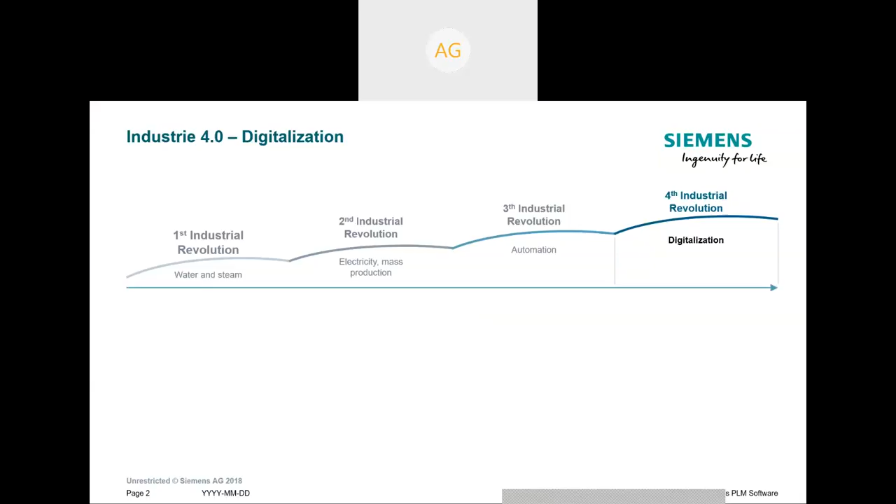Today is the time when we are migrating from the third industrial revolution to the fourth industrial revolution. It all started with the first industrial revolution, when we talked about steam engines, then mass production, and automation, when controls and robotics or hard automation became more prominent. We've all seen the complete third industrial revolution, and we are now in the phase of migrating from the third to the fourth industrial revolution.

In short, we call this Industry 4.0. Basically, what Industry 4.0 brings to the table is the combination of digitalization and digitization, which means the collaboration of design, controls, and many other things over the web.

When I talk about this industrial revolution and digitalization, what it essentially brings for us is an integrated value chain, meaning the flow of information between different departments, countries, and zones becomes seamless. It's not like each department or organization is working in its own silo. So in short, the meaning of Industry 4.0 is basically to have a seamless flow of information between different departments.

It's not like maintaining files and sending them through some person, where there's a lag of information. All these errors or problematic things are completely siphoned off when we implement Industry 4.0. Apart from the integrated value chain, we also incorporate the technology of product and production twins, which is nothing but the digital form of the product and production, and how that product will actually perform. So basically, we're talking about the digital twin of the product and production.

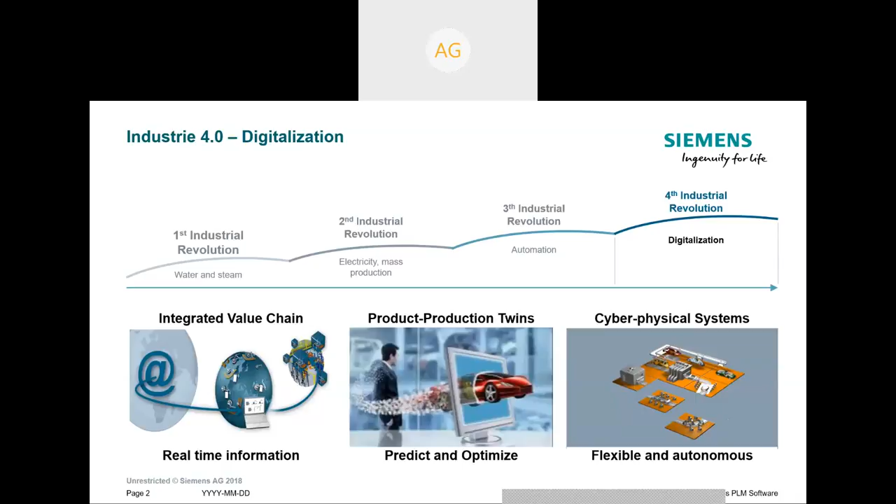So what does digital twin actually mean? I'll start with an example. If I want to design a water bottle, let's say a simple water bottle, that's the concept - that I want to have one water bottle. That's the idea, and I need to put that idea into some digital format, which can be a CAD software. So I'd like to put the idea or image of that water bottle into digital format using some CAD tool. That's the digital twin of the product, in the form of ideation.

Then the second part is the realization. How would this bottle actually be made? What would be the process of manufacturing this bottle? I'd like to put that complete production methodology into digital format - that's called the digital twin of the production setup.

Then third is the utilization - what if the design I've made is functional or not functional? Is it useful for the customer? That's the concept of the digital twin of what we call performance.

If I take the example of an automotive or a car, how do we say that the car is good? It should have minimum NVH - noise, vibration, and harshness - all those things should be minimum. That's the performance level which we check, and we call it the digital twin of the performance.

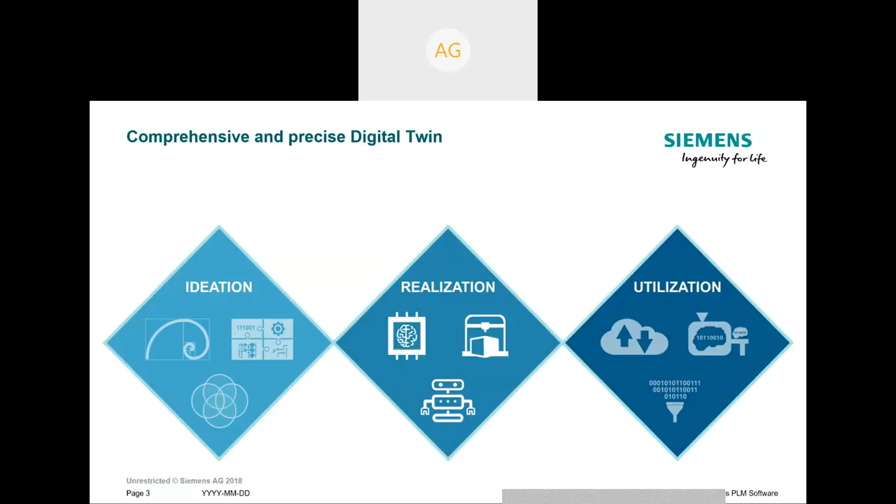In other words, we identify them as digital twin of the product, digital twin of the production, and digital twin of the performance, which means we are not actually making the product. We are making the product digitally first. We are validating the production scenario digitally first. We are checking the performance of the vehicle or any object through digital performance first.

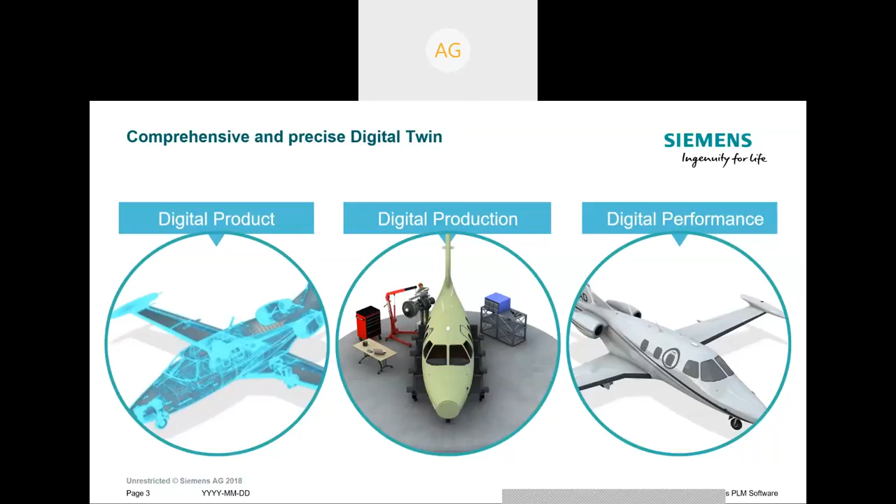So when all these digital twins are verified and completely validated, then through this holistic digital twin, we get our matured product in the market. That's the concept of the digital twin, and that's an integral part of Industry 4.0.

If I go back to my first slide, Industry 4.0 was written as digitalization. So we have converted everything from product, production, and performance into digital format. And how are we exchanging the information? That is through digitization. So Industry 4.0 is nothing but the combination of digitalization and digitization.

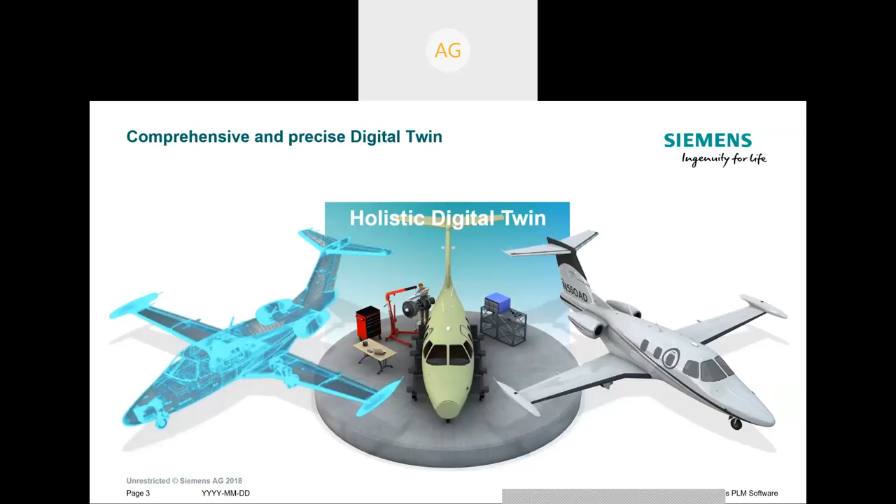So robotics plays a major part. Rather, the robotics have evolved over a period of time. So it's not only robotics, we will be talking about advanced robotics. Advanced robotics is nothing but integration of the advanced functionalities of artificial intelligence combined with various sensors.

Now look at this particular graph - the robot population worldwide is increasing ever, at the rate of about between 20 and 30%. If we go see till 2021, as per the information from this website of IFR, it shows that the average growth would be around 14%. Of course, this has not considered the current scenario of COVID, but we all can stay positive only.

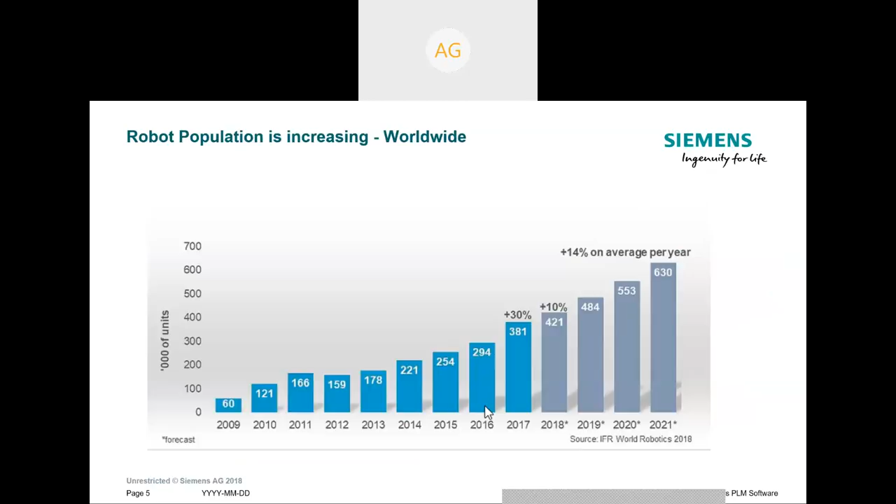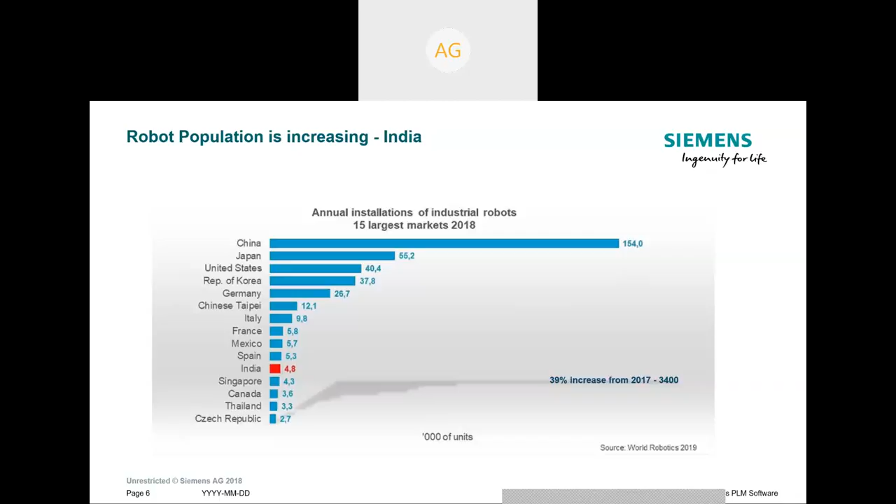Positive is the way to go forward. As per the data, 14% is the average growth of the robot population worldwide. And if you look at where India stands, India's robot population is also growing gradually and at a fast rate. If we compare it from 2017, the robot population has increased by around 40%, which is a good increase. And this robot population increase is not restricted to any specific industry.

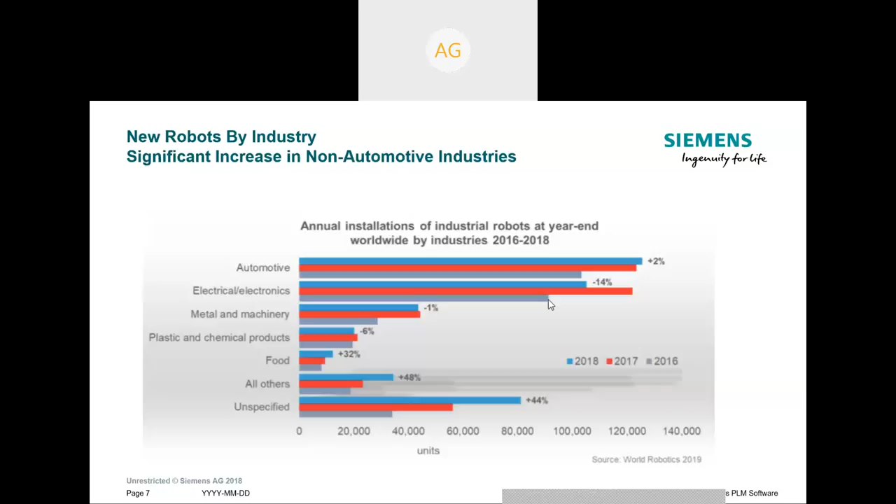If I go back to 2013-14, the majority of the robots was in the automotive sector. But in the last 4 to 5 years, the implementation of robotics plays a major role. But what is the use of robotics in the electrical and electronics from the assembly point of view? There are multiple robotic vendors such as KUKA, FANUC, ABB. All these robot vendors are making robots not only for automotive organizations but for different organizations, or general purpose robots which cater to all industries.

Now we see why we see this big trend of robot population increasing. There's a reason - the manufacturing trends in the industry demand for robotics. If I talk about an automotive organization, now a single organization is not making a single vehicle on their line. A single line is producing perhaps 4 to 5 different variants of the car.

That's called flexible production, which means if there are 4 robots on a single station, that particular station is not working for one car. So they would be reprogrammed, or the programs will switch from number one to number two, looking at what type of car is in front of them. So that's the flexible production - the robotic programs change automatically whenever a different variant of the car comes in front of them.

Global expansion is again a very important cog in the wheel because of Industry 4.0, because it means that we are designing at one place and building at another place. It's not necessary that if I'm making the car in India, it has to be designed in India. If you're designing the car in India, you can produce that car in Europe as well. So that's global expansion, which means the flow of information or data has to be seamless.

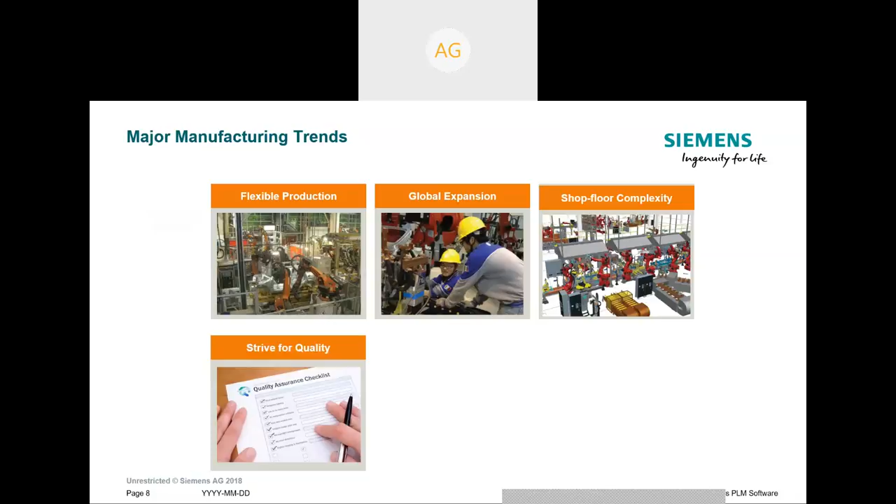That's the shop floor complexity that demands the implementation of new technologies. And strive for quality - we do not want to launch a product in the market which is not good quality, so new technology components have to be introduced. Constant improvement is like reusing the engineering knowledge. If I have designed one car today, when the turn comes for the next car, I should not be restarting the engineering from step one. I should be able to reuse my previous engineering knowledge for the next project. So that's the gist of the major manufacturing trends that lead to the implementation of robotics in a major way.

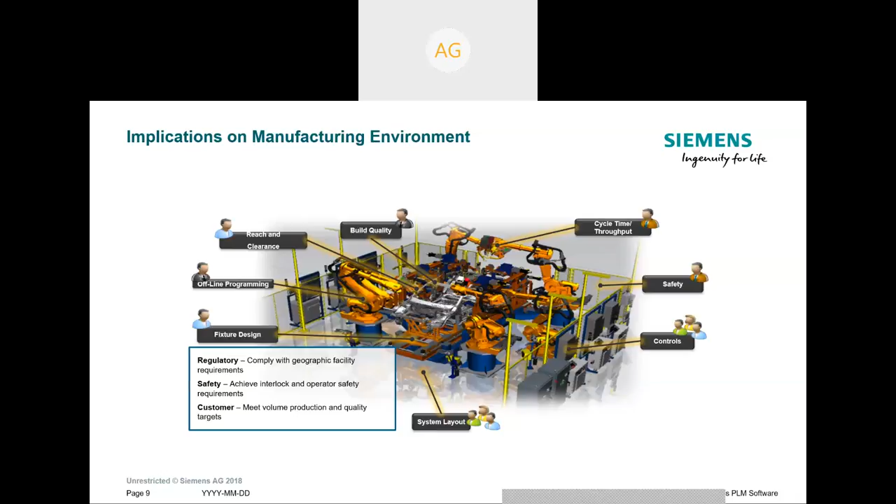So when we are talking about the implementation of robotics, it's not that we buy a robot and just put it in place. There are so many things that come into picture during implementation and commissioning. The robots have to be placed at the right position, we have to think about task distribution among different robots, and at the same time consider the safety aspect, and also the controls point of view.

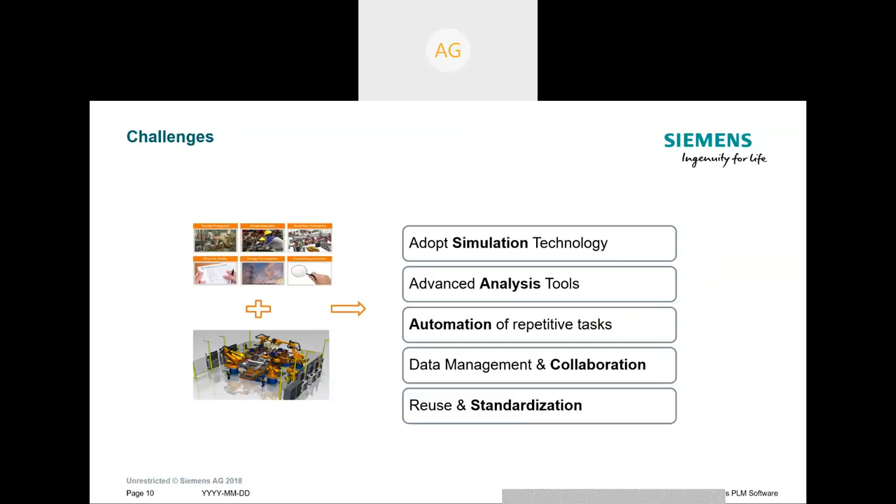So there are many implications when we talk about implementation of robotics, which means we need some kind of solution, which can be a simulation technology that gives us a matured or optimized solution. That simulation technology must address all those manufacturing challenges, implementations, and implications of implementing robotics. So I don't want to get into the details of why these simulation technologies exist, but what can we do using these simulation technologies when talking about robotics.

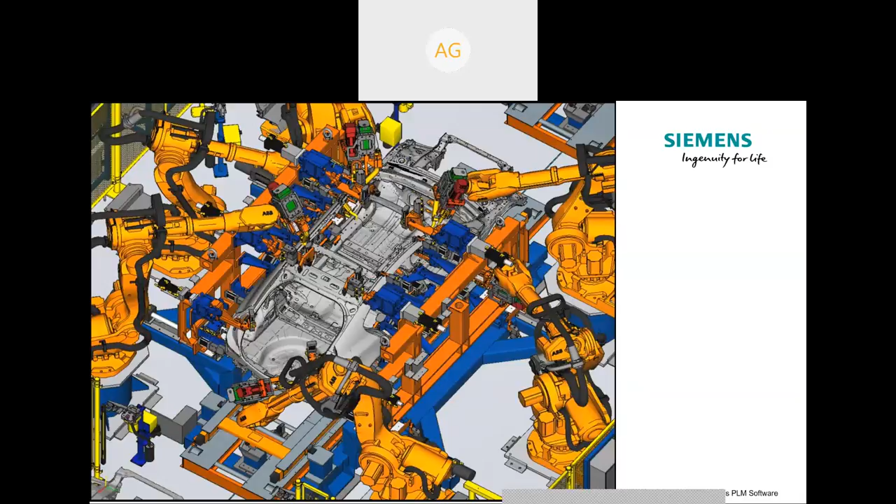So this is one example of a car organization where there are multiple robots working together to make one car. It's a combination of various electromechanical equipments - there are robotic weld guns mounted on top of the robot. The demand of the industry is that the operator or shop floor person should not be spending too much time on the shop floor.

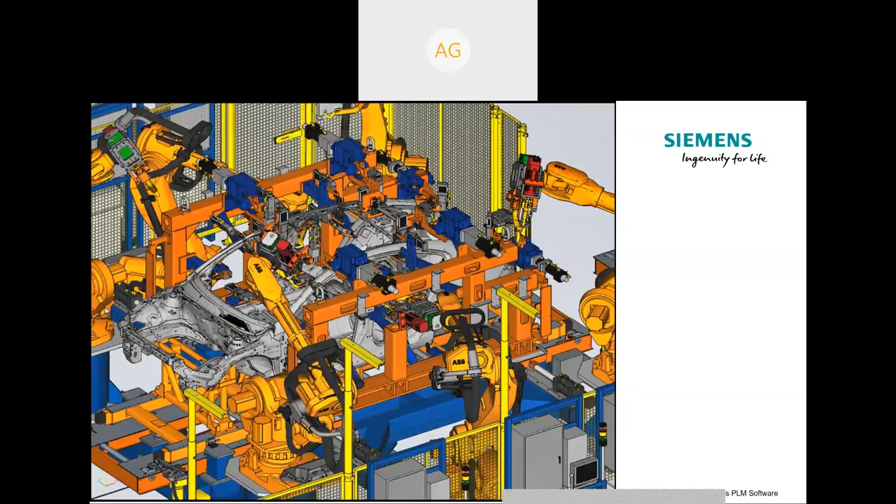So the simulation technology helps the engineer validate all those things in the simulation software and program the robots of any make, validating them inside the simulation software so it can be downloaded directly to the shop floor. So there are multiple components when we talk about the usage of robotics in the simulation environment.

We have the robot controller software, which we call RCS. Normally this RCS is developed and given by each robot maker, and then there is the OLP, the offline programming concept, which helps the simulation software download the robotic program in the right syntax as required by each robot vendor. So there are multiple robots which require to be programmed, and this simulation tool should be able to provide a matured robotic program that we can validate inside the simulation technology.

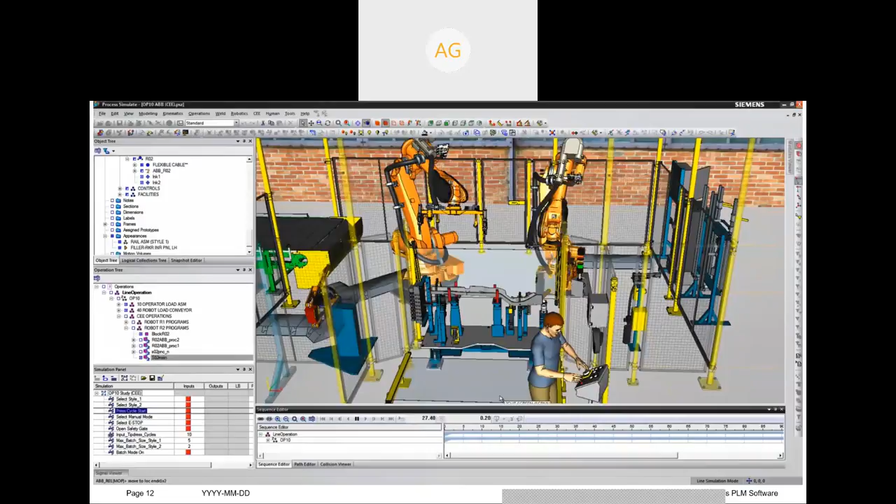So this tool, which is being developed by Siemens, has been used in most of the industries in India, and it's a generic tool for all the robots.

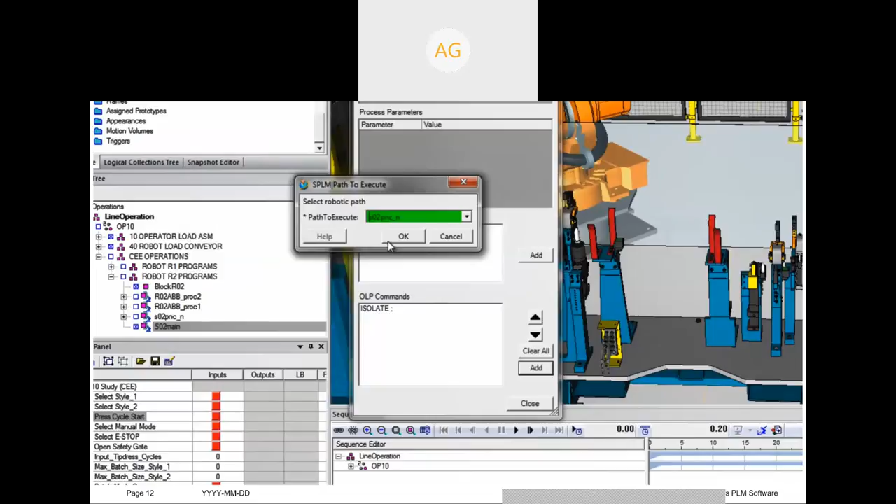With the help of this simulation tool, one can generate or add all the proper syntaxes of the robotic program. One can define the input, output, or any kind of signal required for the robot to communicate with the PLC or the robot controller itself.

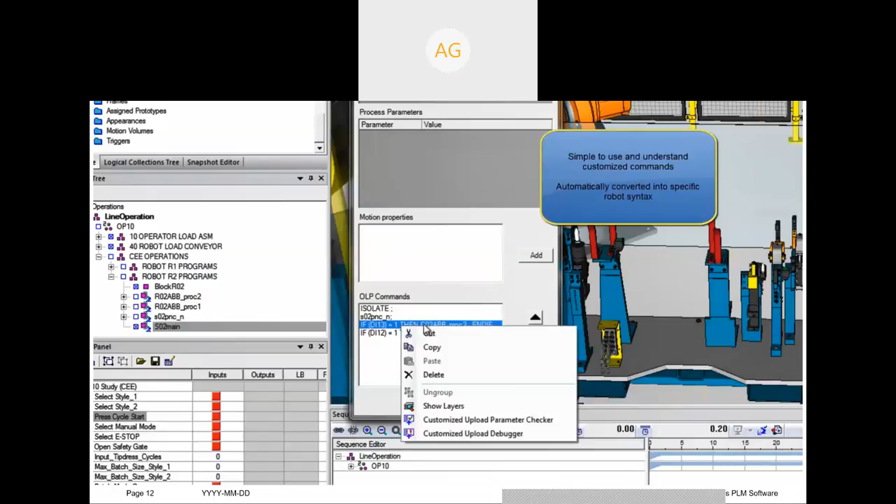Any production line will not be making just one car at one time. It can be a combination of various cars, so we call them variants. We can check the production scenario of different variants inside the simulation software.

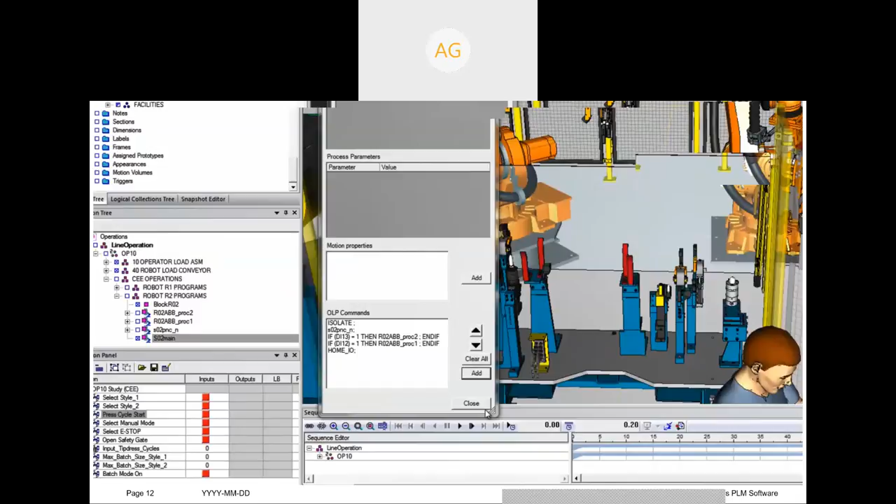At the same time, we are also doing event-based simulation. When I say event-based simulation, that means if a robot has a gripper in its hand and it has to pick the part from the fixture, the robot should move only when the clamps on the gripper are open and the part is present in the fixture. Only then should the robot move down.

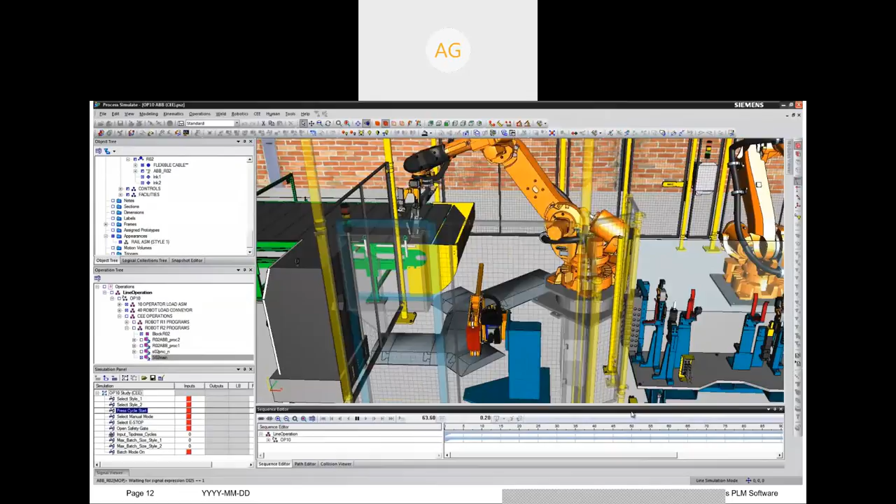That's the event-based simulation, which means when event A happens, only then event B will happen. And when event A plus B happens together, only then event C happens. That's the meaning of event-based simulation.

In this simulation technology, we are checking the production behavior of two or multiple variants being produced in the same environment, and the different robotic programs are also validated inside the simulation environment. So that is the pick and place application.

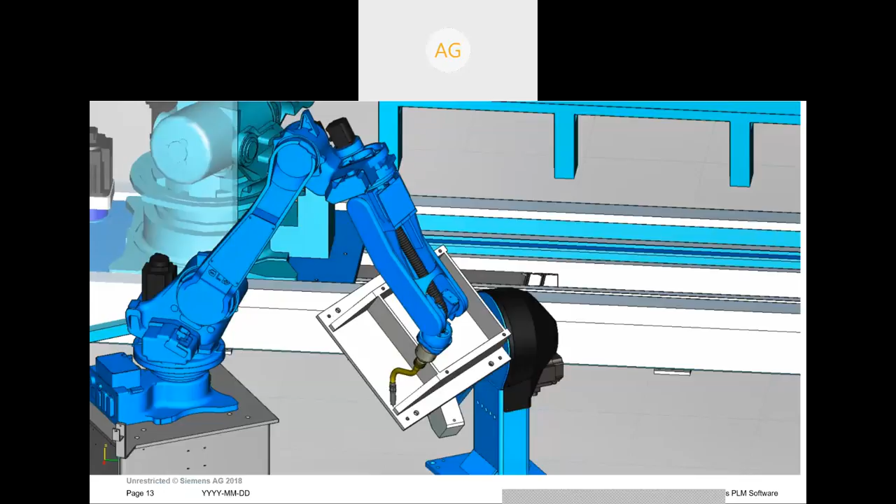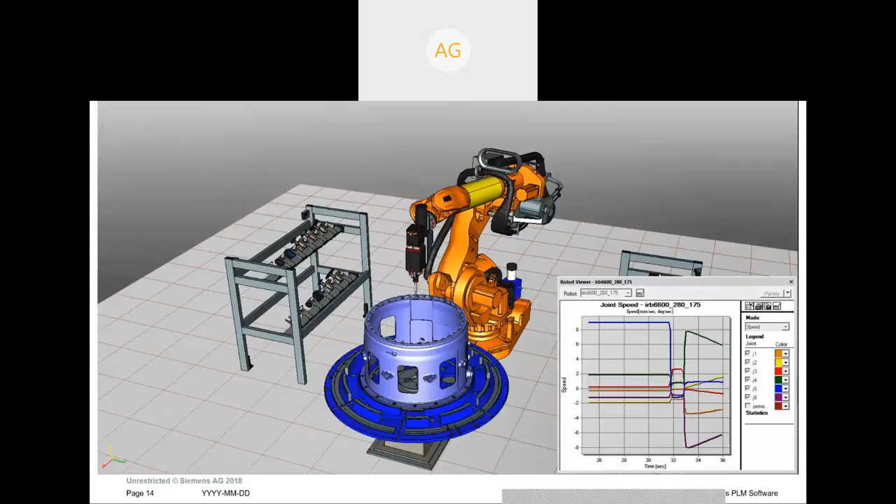Another application of robotics is the deburring application, wherein the robot picks up the tool and does the deburring. We are also monitoring the robot joint behavior in the robot viewer on the right hand side, which helps us in smoothing the robotic motion.

It's not only limited to just one robotic vendor. Any robotic vendor, it can be Kuka, Fanuc, Yaskawa - all these robotic vendors can be put to test here.

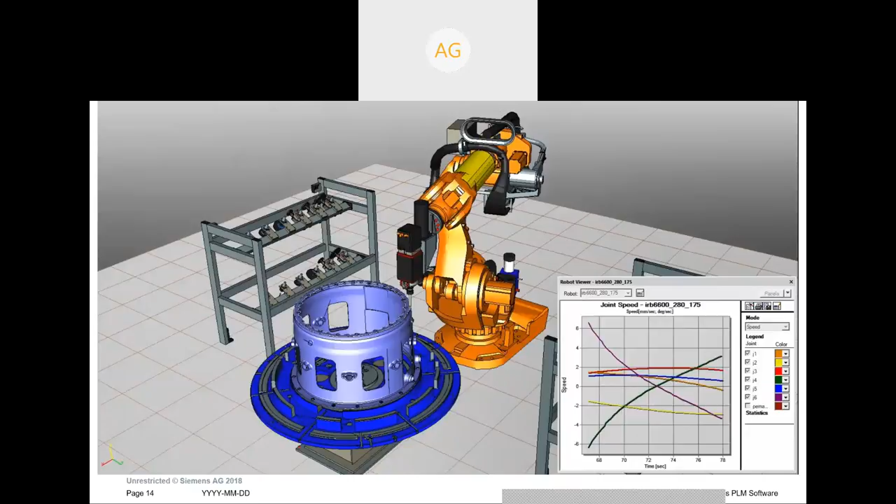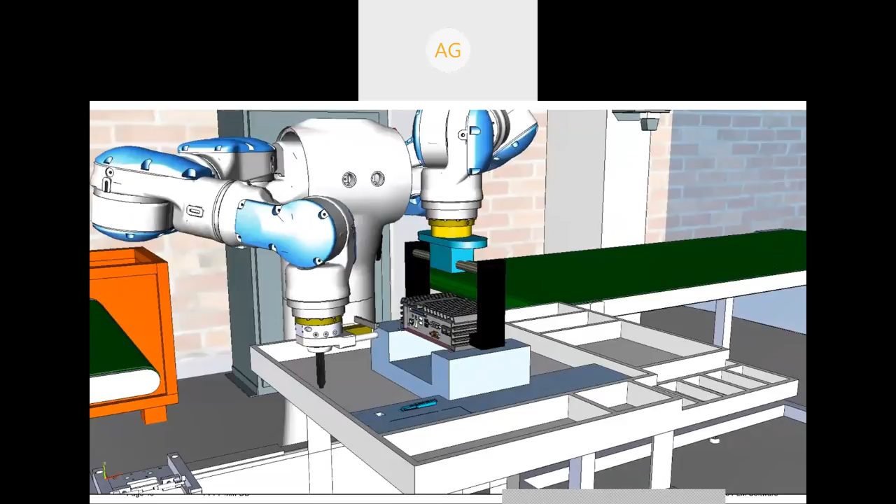In this case, you see that an amplifier is getting assembled here, and we can easily plan the motions offline rather than doing them online on the shop floor.

So this is the application of robotics and how robotics can be made easy with the help of simulation. Up till now I have spoken about the usage of robotics, and whatever we have seen till today are the traditional robotics.

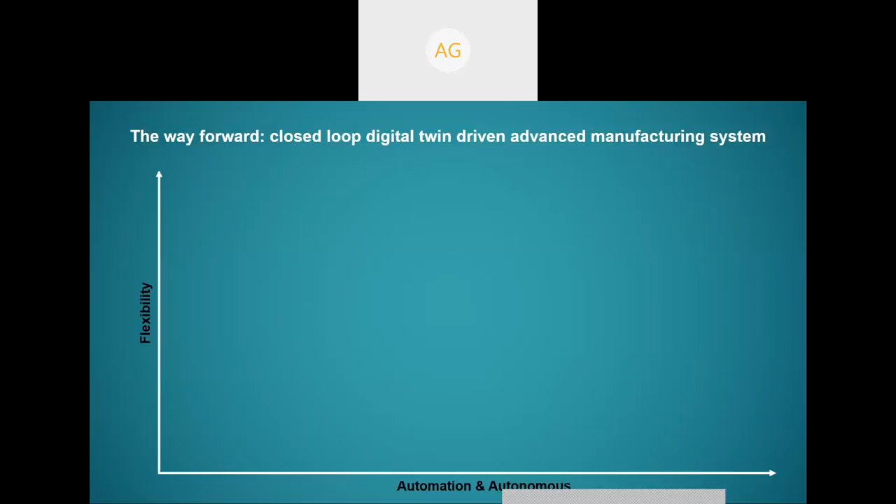Now, what is the way forward? Because whatever I've spoken is completely independent of what other part of the factory or the design house is doing, the way forward is to have a flexible and autonomous kind of solution.

I think that's the motive for all of us to be in research and development and do more research towards making flexible robots. Anyway, the robots are flexible, but the autonomous aspect is where human intervention is very less.

I think it all started with fixed manual, where there were no robots, then flexible manual, then we have fixed automated lines. Whatever we had seen in Industry 3.0, we spoke about fixed automation. Now in Industry 4.0, we are talking about flexible autonomous, which means the robots or any programmable devices we use should be flexible enough and have minimum human interference, and the communication should be seamless. That's the demand, and that's the way the industry is looking forward, completely as a closed loop.

With the help of digitalization and digitization, we are going to make it a closed loop, so that if I design from point number one, the feedback should also come back to point number one, so that I could make changes at point number one and send it to the shop floor after receiving the feedback.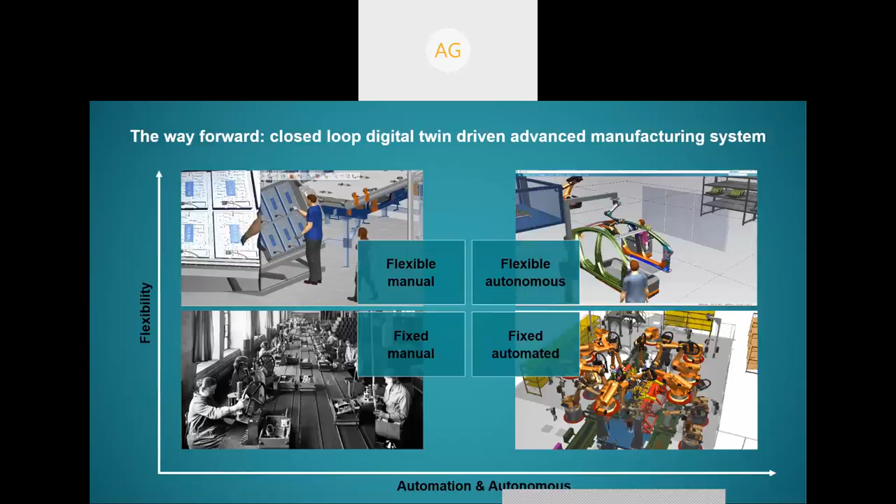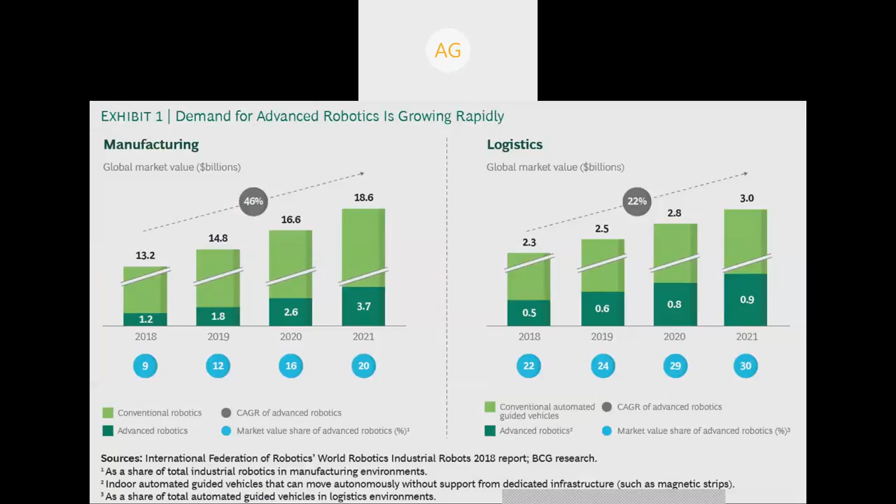This graph reflects that industry is responding very strongly to the adoption of advanced robotics. We can see drastic growth, about 46% from the manufacturing point of view, and from the logistics point of view, a very strong growth at 22%. This shows that the usage of advanced robotics is increasing rapidly. By advanced robotics, I mean the usage of sensors, AI, ML, cybersecurity, and other components of Industry 4.0. From Siemens terminology, advanced robotics is a combination of various technologies, and the industry is responding very strongly.

In this video, you would see a very strong technological component which we call virtual commissioning. Normally, there's a production line with 100 or 50 robots, and the PLC is always talking to the robots and peripheral equipment. Normally the PLC programming is done in the design house, and the robotic programming is also done in the design house, but the handshake between these two components is done on the shop floor. That's the commissioning phase, the real commissioning phase.

So I'm talking about the concept called virtual commissioning, wherein the virtual setup of the factory is run by the software model of the PLC.

Now in this video, you would see that I have an HMI running from the actual PLC controller and managing the production environment in my simulation tool. This means I have done proper mapping of the signals inside the simulation software with the SIMATIC HMI. So what does this normally help with?

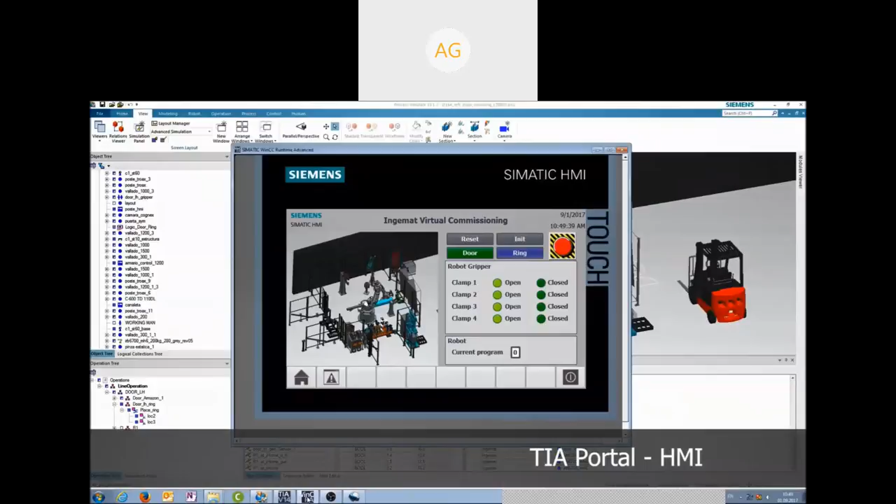This helps us debug the PLC program at an early stage and check all the what-if scenarios early. So when I go to the shop floor, I'm not doing any debugging there because I've already done that debugging and optimization in the design phase itself, on my laptop directly. The robotic programs are now more mature because I have validated where the signals have to be put and what kind of signals have to be put. So any kind of optimization is also done at the early stage itself.

So industries are now saving at least 30% of their setup time on the shop floor. This is also an integral part of Industry 4.0, when different departments like design, robotics, and controls work hand in hand. Earlier, people in the office worked on layout, simulation, design, and planning, but the controls and handshaking part of robotics was done on the shop floor. What virtual commissioning has done is put that controls and programming part into the office setup, which means the shop floor tasks are now shifted to the engineering level.

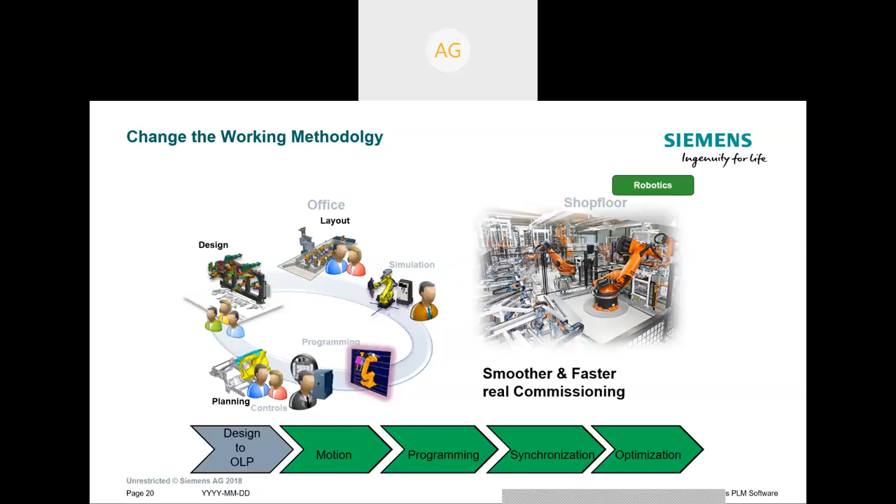So now the robotics part is left to the shop floor, and the integration part is left to the shop floor, and the handshaking time is reduced drastically. What essentially this does is the mechanical guy does his own work and the electrical guy does his own work, and both now work together hand in hand to evaluate their mechanical and automation system behavior.

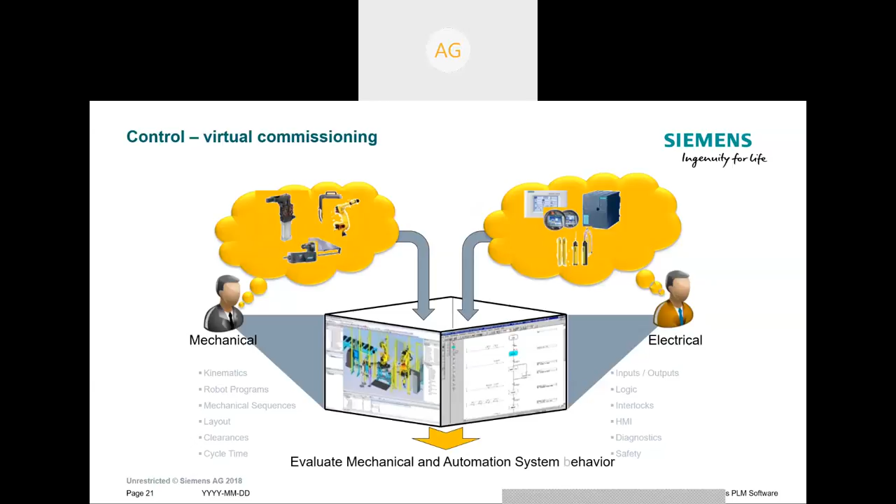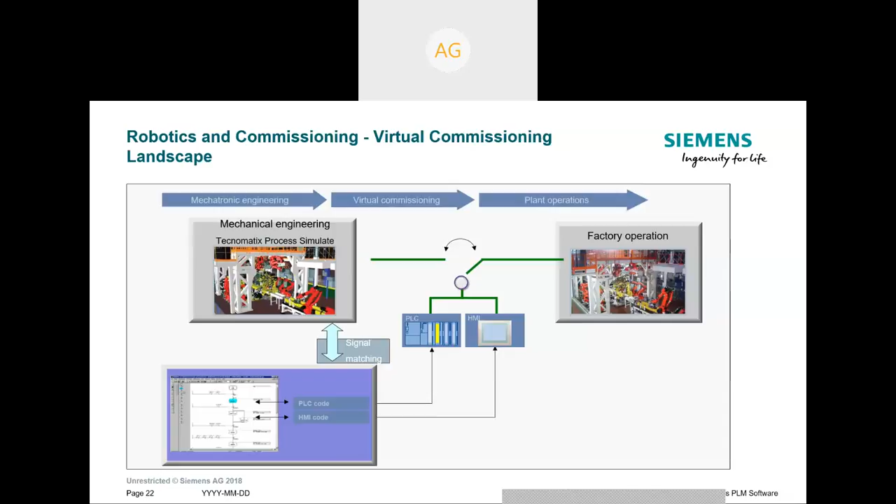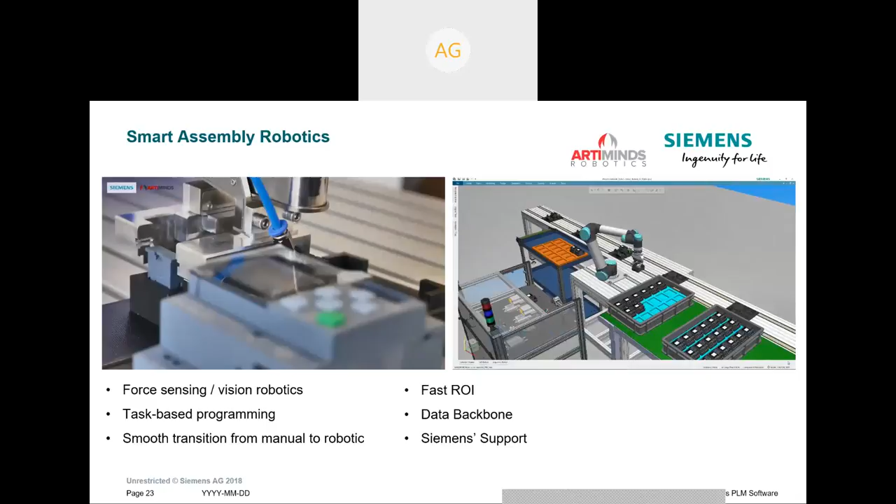So the next component is the smart assembly robotics, wherein we are seeing the usage of cobots. Cobots are robots which work hand in hand with humans, which means they are smart enough that they do not harm the operator or the engineer who is operating it.

It's very easy to program. One can just program this robot by holding and moving it by hand, and recording that particular location.

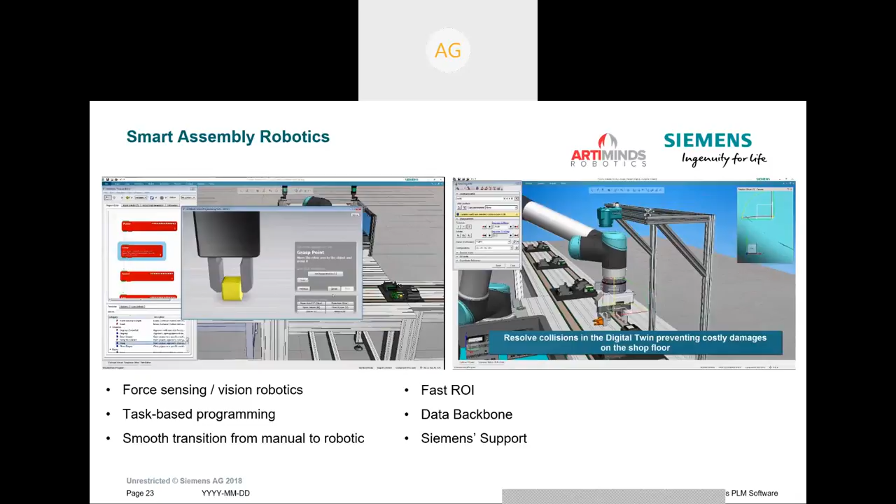It is used in collaboration with a third party company called ArtiMinds. ArtiMinds helps to program this robot, and this program can be directly transferred to the simulation software, where a complete process can be validated.

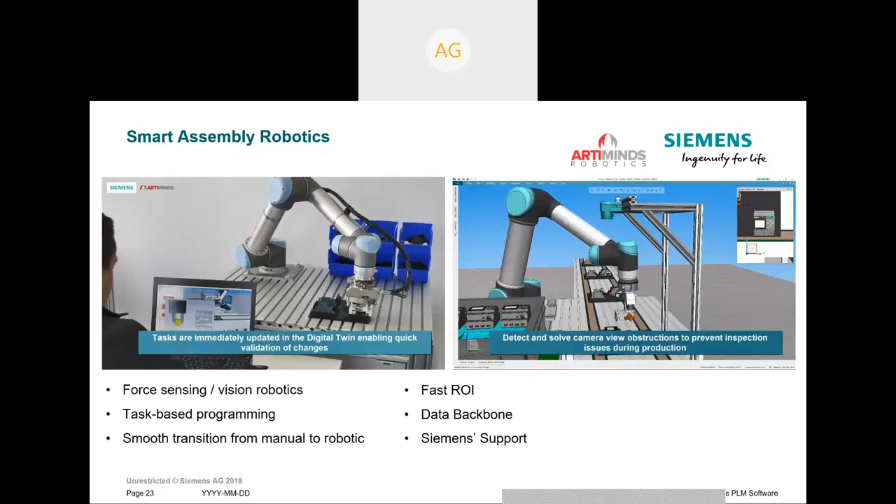When we are programming the robot, we are just programming for, let's say, pick and place operation, but it also has to perform multiple operations. So those multiple operations, checking of collisions, and checking of the camera can also be done inside the simulation software. So what we have on table is a complete matured program, or the complete matured setup, which is fully validated.

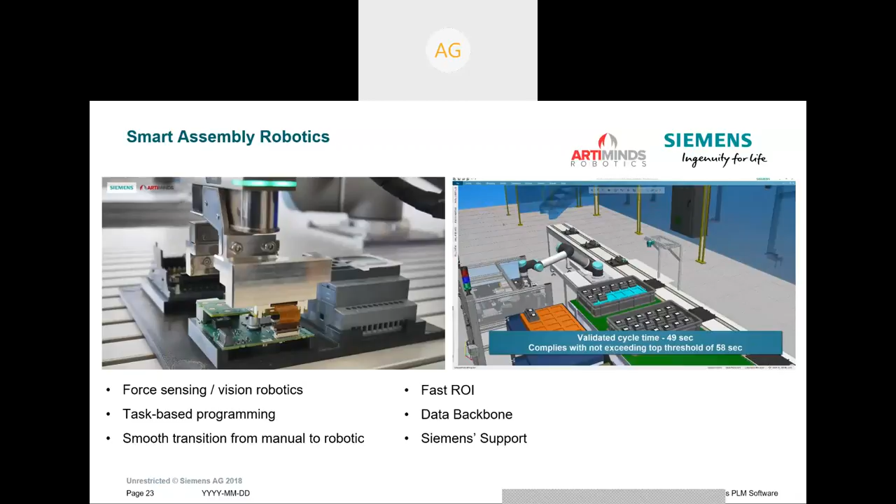So AGV commissioning is the third very important component which will be introduced into the industry in a big way.

AGVs, automated guided vehicles, are completely autonomous, and we are commissioning these AGVs with the help of virtual commissioning, which means the PLC coding and PLC programming of the AGV is also validated in the simulation software directly. AGVs are the ones which can carry the product, or which can carry the robot itself.

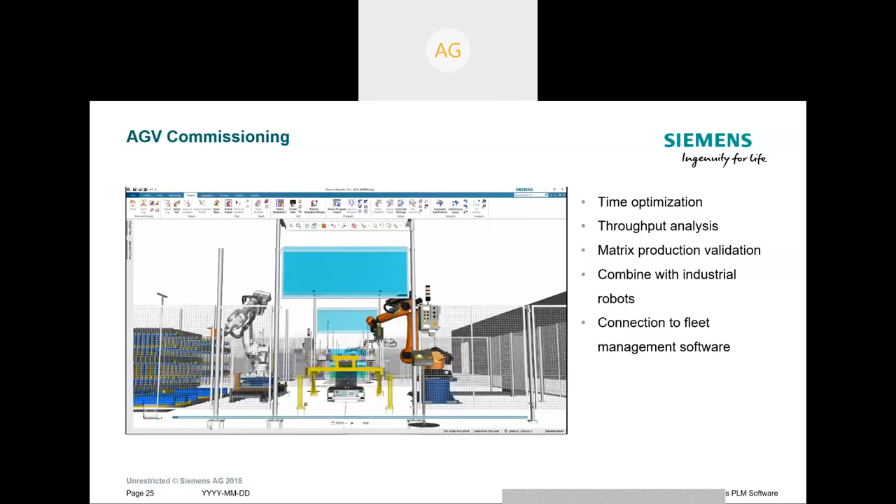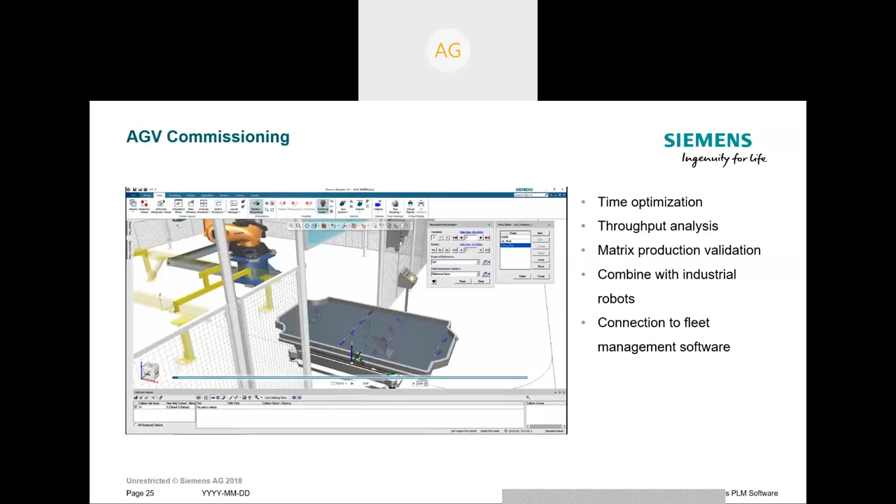With the help of various advanced simulation technologies, we can program the AGVs, validate their movement, plan their path, and also check their communication with the fleet management. There are multiple fleet manager organizations in the country which talk to the PLC as well as the AGVs, and plan their paths accordingly.

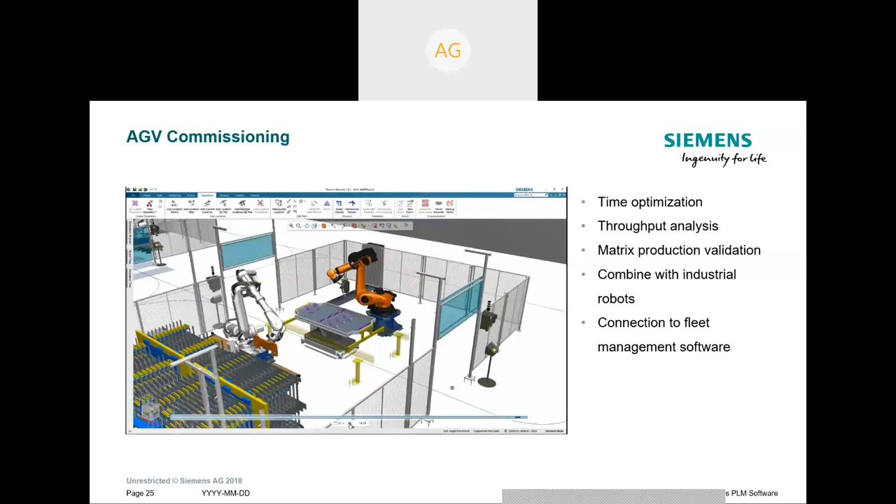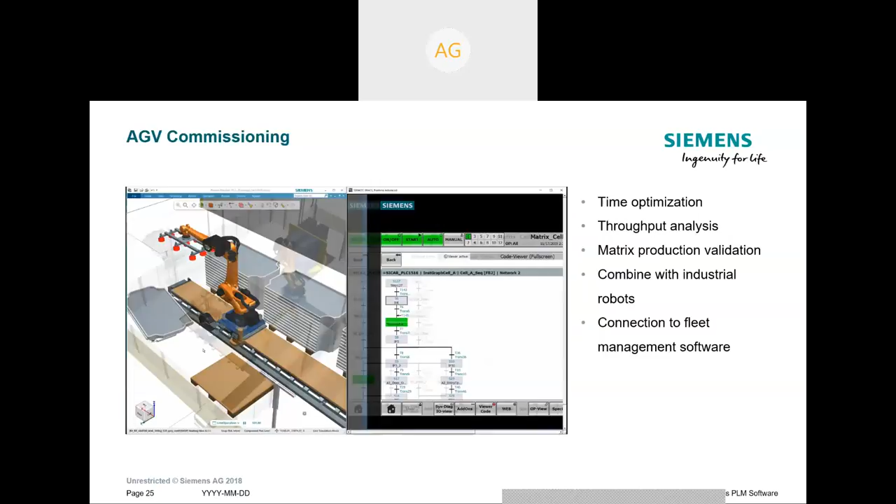This AGV can also be directly connected to the PLC program and checked for its behavior. Now you see here that the AGV has brought the component towards the robot, or in the other case, it could be that the AGV is bringing the robot towards the part. So it can work both ways.

So you see, it's a proper ladder logic program which is being used to run the robotic setup, and we can anytime change this ladder logic, download the program once again, and run it.

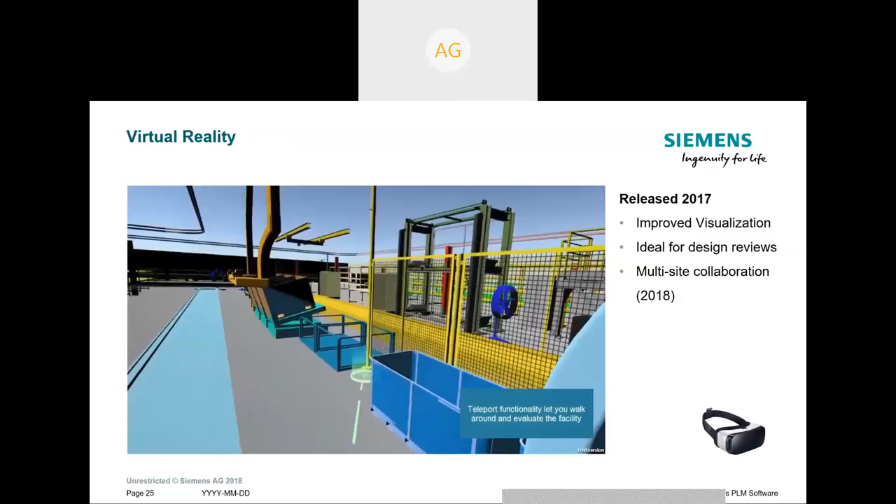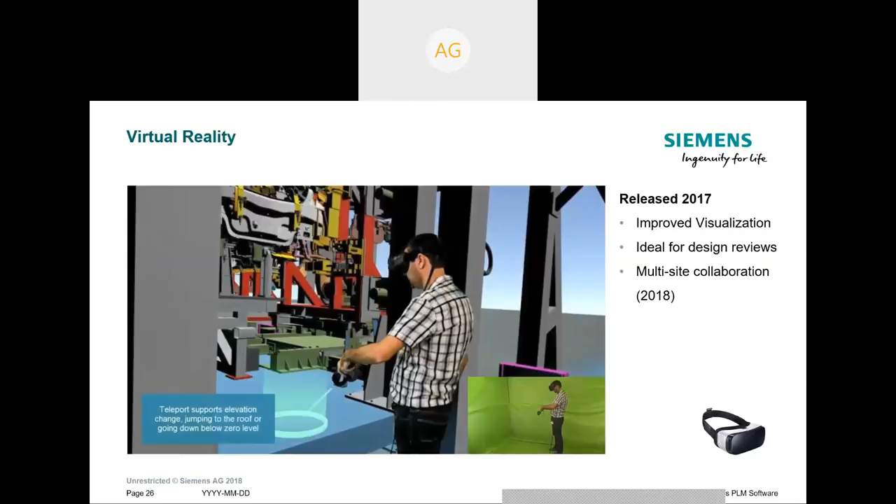Now again, a very important and interesting functionality of Industry 4.0 is the usage of virtual reality, wherein we can make use of the HTC Vive headset which this guy is wearing. He is standing, on the right hand side, in an empty space, but while wearing this headset, he is connected to the simulation software environment and can see the actual production setup in an immersive manner.

With the help of this handheld device, the remote, he can jump anywhere or teleport anywhere onto the station.

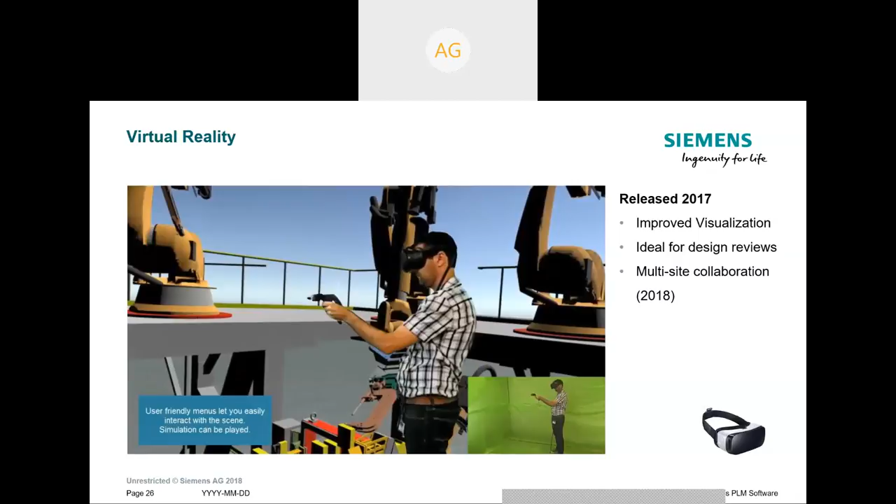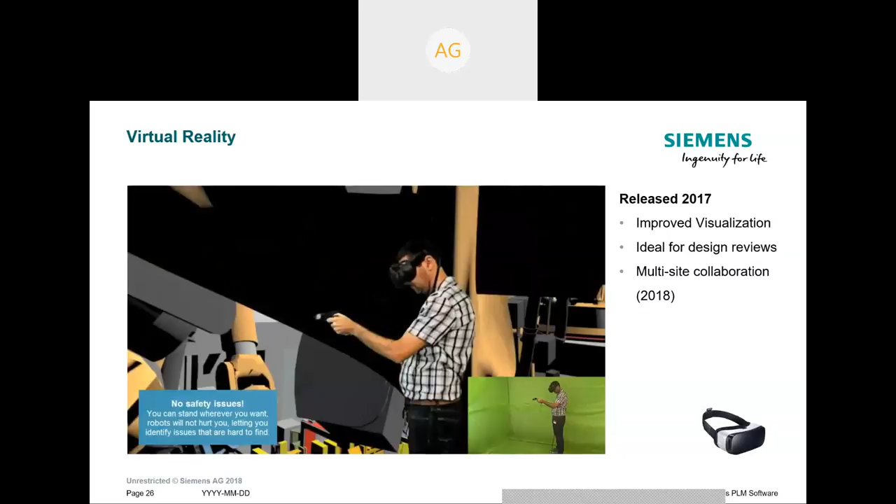Since these programmed robots are already programmed, he can run, play, and pause this simulation at any given point of time. While he is observing this simulation, standing right in the middle of the production setup, he is not getting hurt. That's the advantage of using virtual reality.

He can move the robots just by using the handheld device, and he can also jog the robot with the help of the handheld device using the TCP, the tool center point frame.

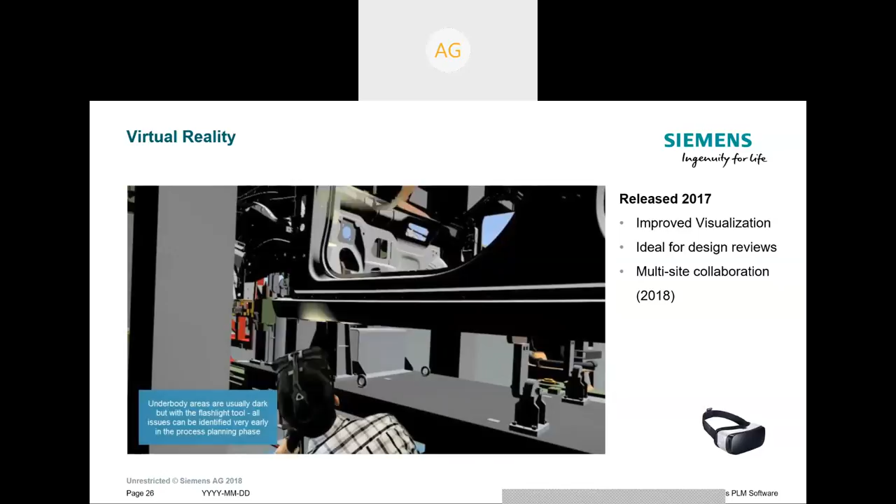There are multiple benefits and functionalities of the VR also. You have this torch in the handheld device. This is not an actual torch, but it is virtual. When you are wearing these glasses, you could see the actual light being put on dark surfaces, and you would feel like you have an actual torch in your hand, and you can throw light at any dark spot and visualize it. So that's the function of having this torch light.

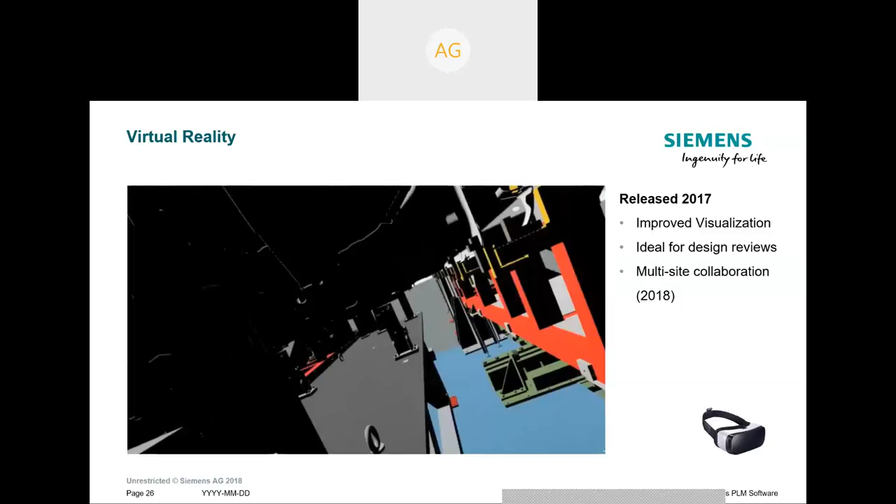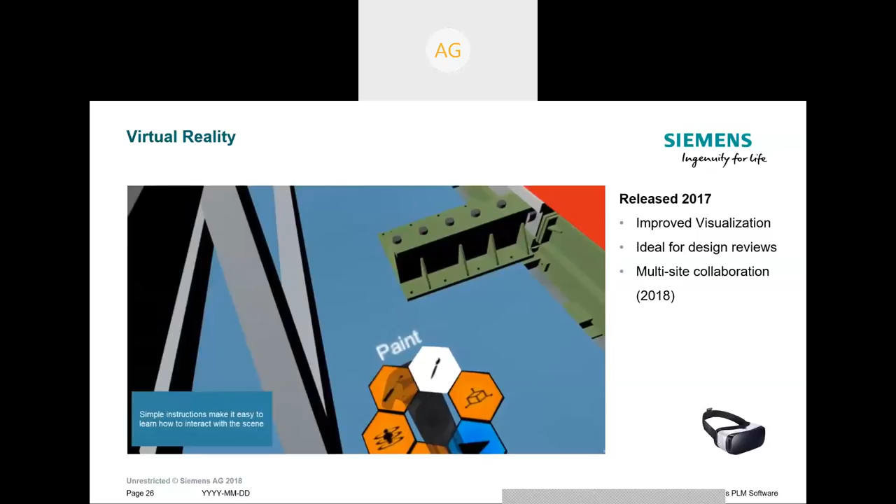While you're observing this inside the immersive environment, you can always give technical feedback, make notes, and give it to the design people who can make changes. So that's the closed loop of the digital functionality, now that we are in the production setup.

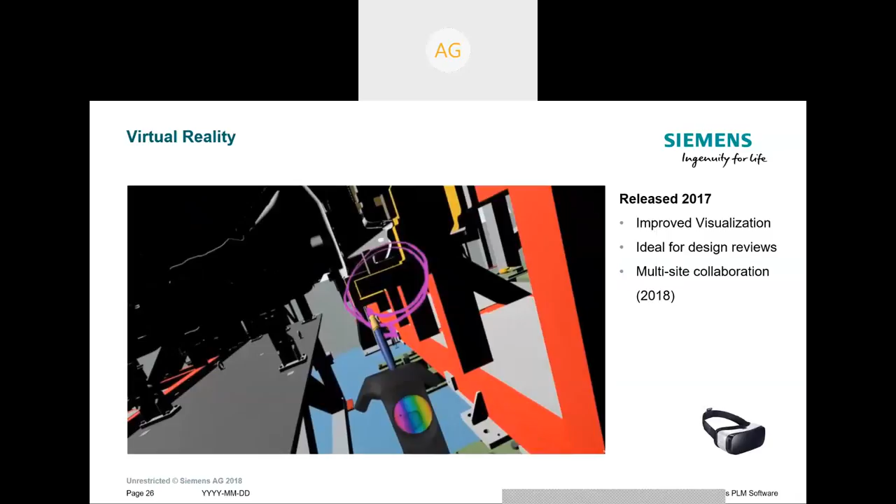The line is working, but while I'm in the immersive environment, I could see many things which are not right. So I could make a note of them and send directly to the design engineer.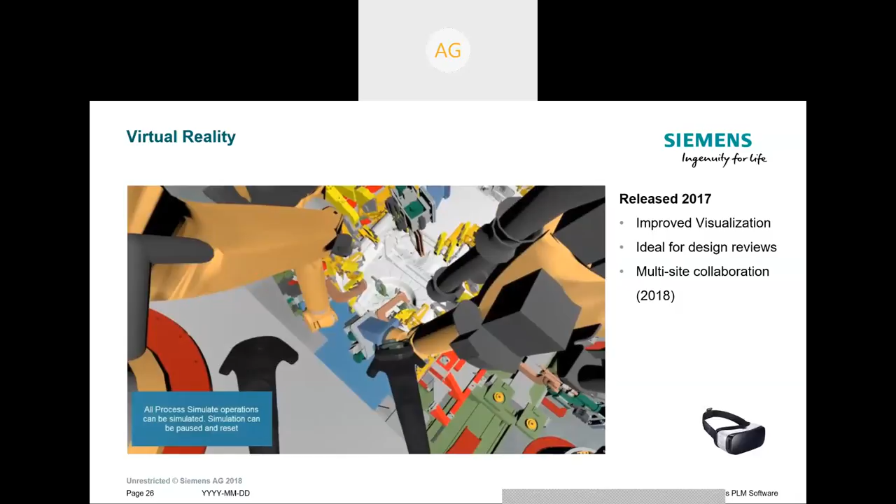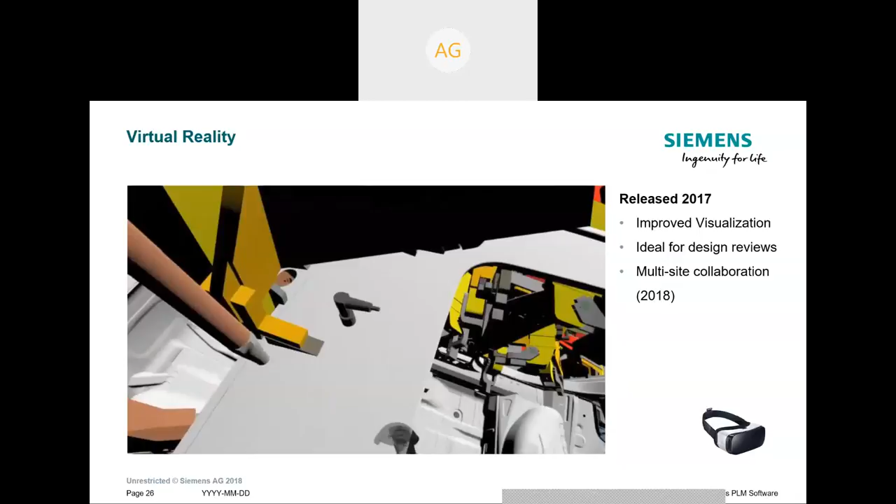The benefit of virtual reality is that two people at two different sites can visualize the same simulation at the same time. We call it multi-site collaboration. If I've designed this simulation and want to show it to someone in Jamshedpur, we both can wear the HTC Vive and visualize this complete environment by immersing ourselves into the production setup.

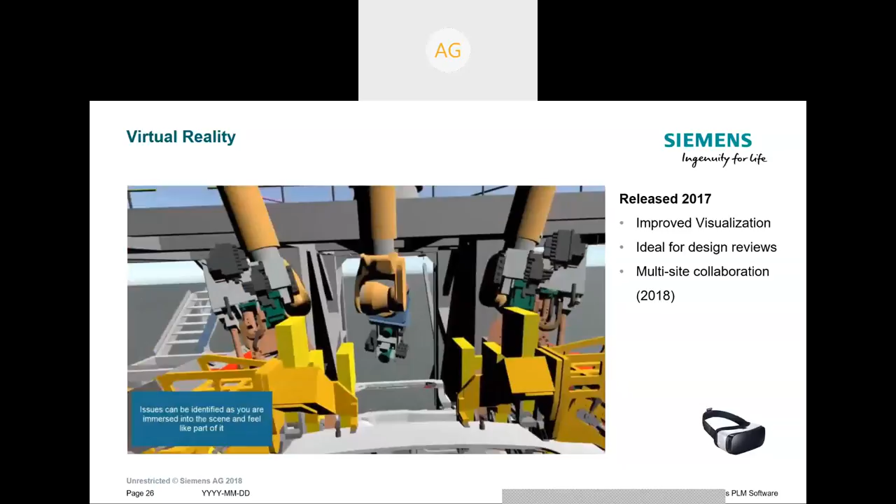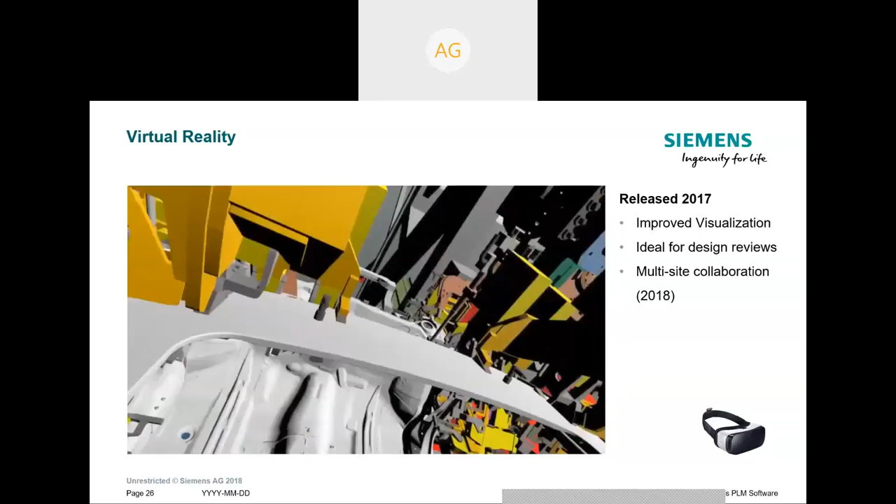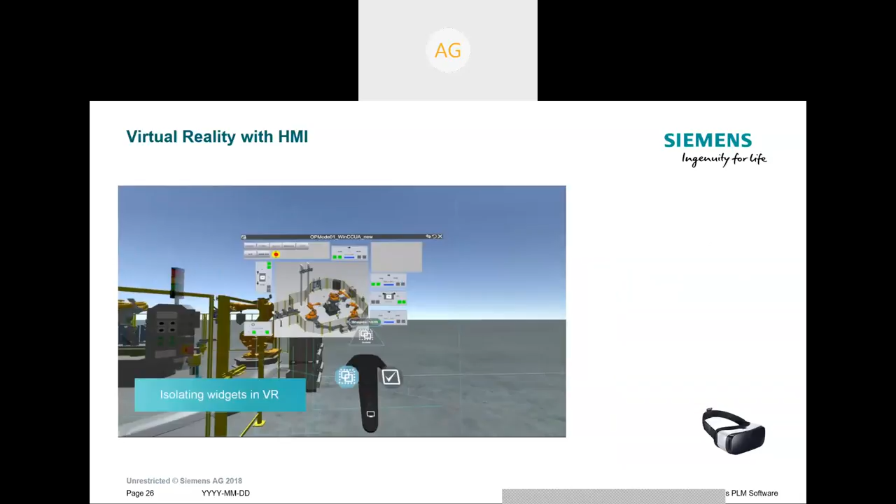Apart from normal virtual reality, we can also validate our production environment using the HMI, which means the virtual commissioning part can now also be integrated with virtual reality. The HMI sizes and widgets can be controlled at any given point of time, and you can run the production simulation environment using the HMI in front of you.

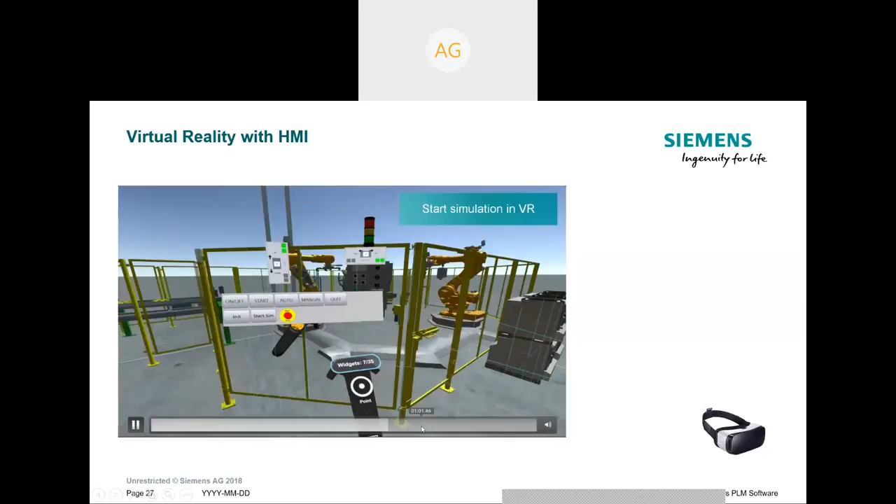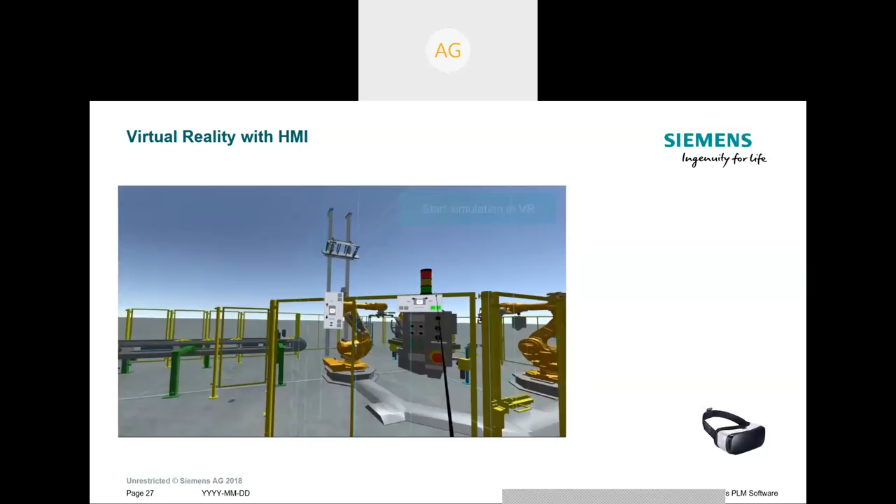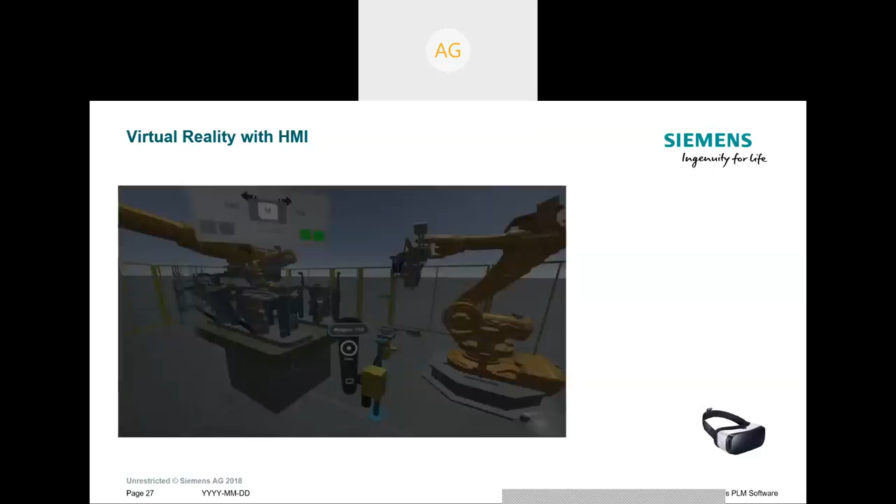Siemens has been working a lot on these high-end, advanced technologies and is a leader in the market. When it comes to digital transformations, most organizations in the world use our tool for simulations, and people have seen a lot of benefits. The time they spent earlier is now a lot less when they use these simulations. For robotics, simulation is very important.

Today I've spoken only about robotics from the manufacturing point of view. I'm sure your motive is more towards research, but my idea of giving this presentation was to share insights of the industry - what industry is looking at, what is trending, and how Siemens is working towards complementing the needs of the industry. If we are doing some work for the industry, what could be our focus and direction - that's my motive.

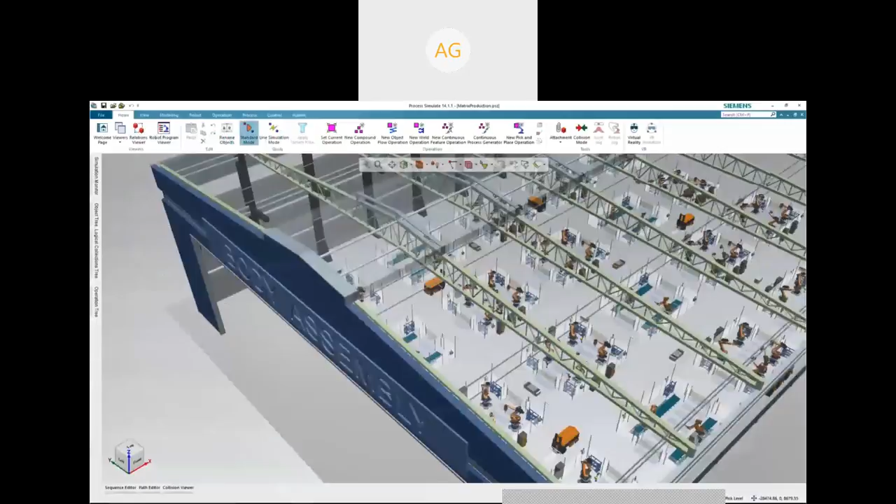So that's a complete factory, for representation purposes. It's a complete flexible factory where we have multiple stations, multiple areas producing different parts, and we have incorporated a number of technologies here.

We have incorporated the use of AGVs here. The part is being fed using the AGVs, and there are AGVs used for logistic purposes. These AGVs are smart enough to detect any collision in front of them, and to find if there is any human in front of them, so they can stop or change the path. In this complete smart factory, we are seeing almost negligible human intervention.

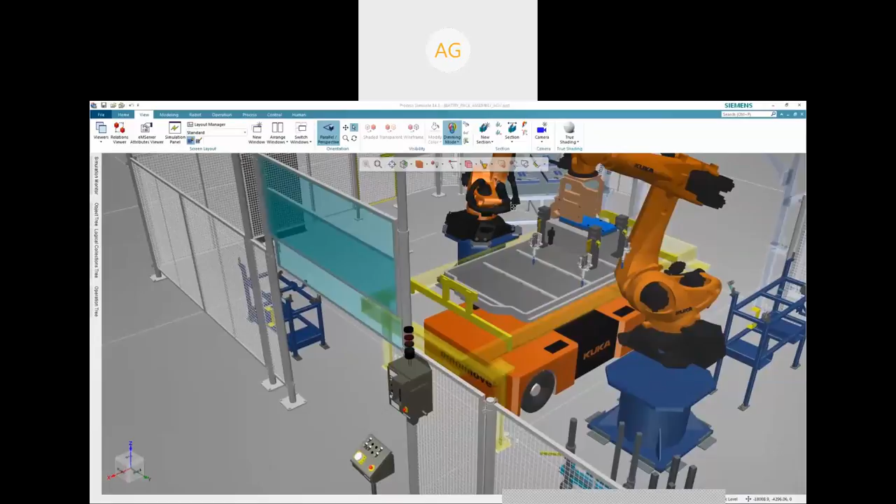Parts are being loaded directly and accurately, and when the task is completed, the AGVs collect that part and move forward. In front of us is the production of batteries for electric vehicles.

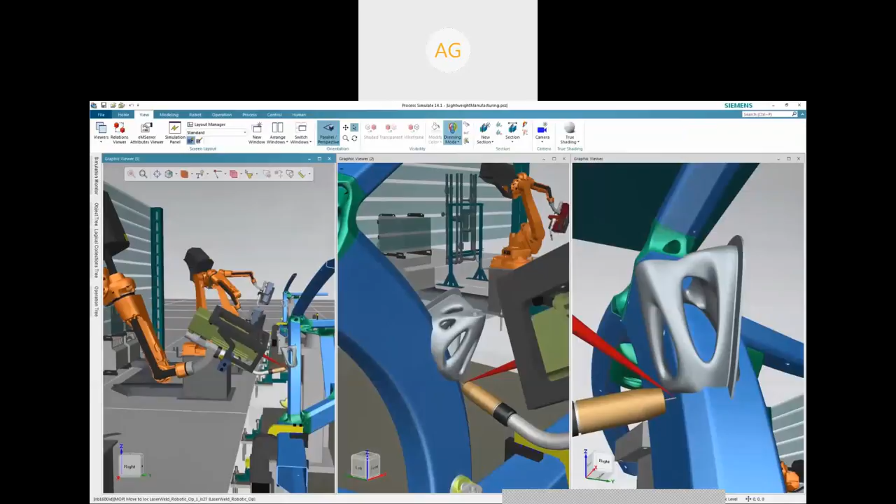Tesla has been using our technology for this laser welding as well. The tools are smart enough, and the robots are also smart enough to find out where the welding has to be done. Because there is always a difference between simulation and the actual shop floor, there's always a difference in the parts and where it has to be welded. So with the help of smart tools, we handle it.

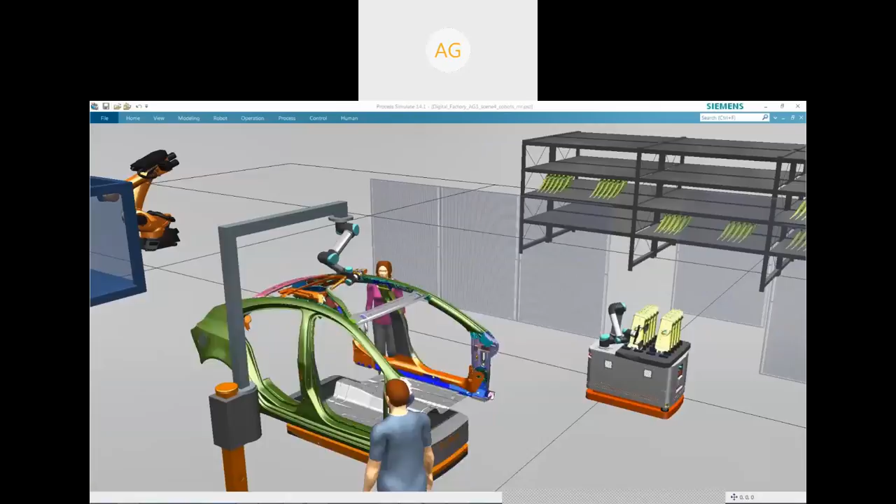In this snapshot, you would see a cobot handing over the part to the human operator, and when the parts are being loaded, the AGV moves to the next station. That's called autonomous and flexible manufacturing, or smart manufacturing.

I think I could complete this within 50 minutes, and I'm open to any kind of questions from your side. Please let me know if there are any questions.

Are there any questions? No, sir. So how do we take it forward, Dr. Dalla? Can we close this session, or how do you want me to take it forward? I think Vijay sir muted his mic. Okay, I think we need to wait for half a minute.